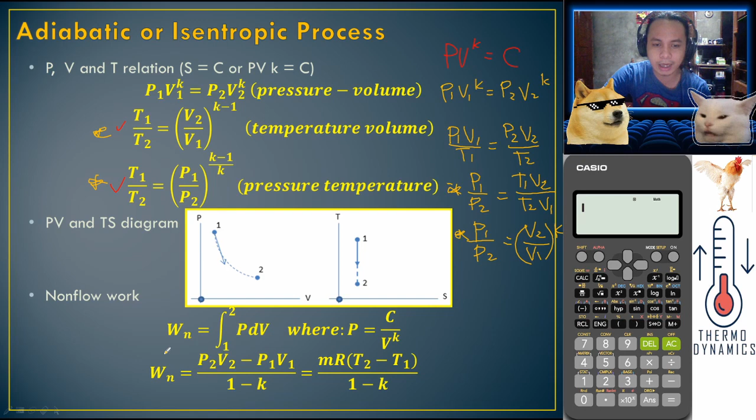Okay. And then we have the change in internal energy, MC delta T pa rin po. Or equal siya sa negative non-flow work. Ano ba yung non-flow work natin? Ito. So, kaya nga lang, negative po yung ating change in internal energy. But still, MCV delta T. Kagaya ni change in enthalpy, MCP delta T. Same pa rin.

Heat transferred. So, ang ating heat transferred daw ay 0. Okay. So, ito nga kasi yung definition ni adiabatic process. There is no heat transferred to or from the system. Kaya 0 yung ating heat. And kung 0 yan, doon pala nakuha yung delta U is equal to negative non-flow work. Kaya pala bigla tayo nagkameron dito. And last, change in entropy is matic 0 siya. Kaya nga po siya isentropic.

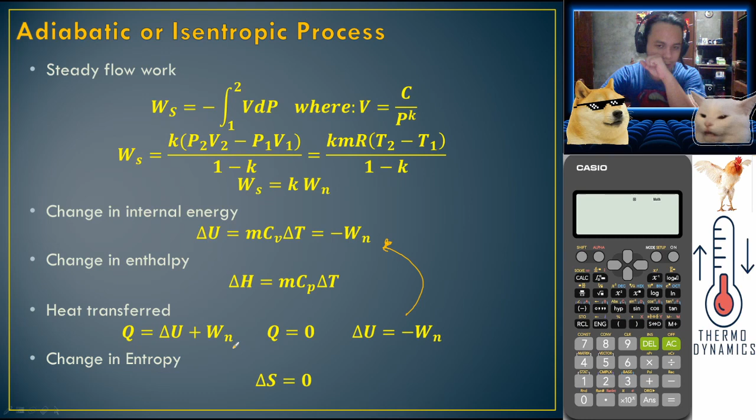Okay. So, dapat po, kabisado natin yung mga formula. Kaya nga lang, magkaka-connect po yan. Kaya po mahalaga na kapag tayo ay nagmamaster ng formula, kailangan po kabisado natin yung bawat isa. Alam natin yung mga pagkakaparehas nila at saka yung mga differences nila.

Okay, 29. Air having an initial pressure of 6,516 kilopascals and an initial volume of 0.113 cubic meter and final volume of 0.057 cubic meter. Calculate the pressure at the end of compression. Alright, so paano ba yung gagawin natin dito? Ang given lang po sa atin is the pressure, and then meron tayong V1 and V2. Hinahanap si pressure at the end of compression. So, most of the time, kapag compression pinag-uusapan, pupunta tayo sa isentropic.

So, ang gagamitin natin is the first formula. We have P1V1 raised to K equals P2V2 raised to K. The problem is, hindi binigay sa problem yung K. Pero pag air po, dapat kabisado natin yung constant K, the gas ratio. Ano po ba ang gas ratio kapag air? We have K is equal to 1.4. And kapag alam natin si K equals 1.4, madali na pong i-solve yung ating problem.

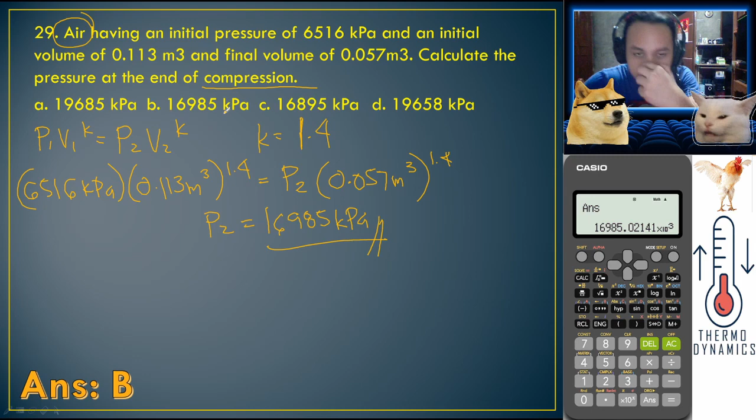Solved! We have 16985 kilopascals. So, meron ba tayo dyan? Of course. Letter B. Medyo nakakalito lang yung mga choices. Pero yun, 16985 kilopascals. Alright! So, proceed tayo sa number 30.

How much work is necessary to compress air in an insulated cylinder from 0.20 cubic meter to 0.01 cubic meter? Use T1 equals 20 degrees Celsius and P1 equals 100 kilopascals. So, ito po pag nakita nyo, matic isentropic. Alin po yun? Insulated. Kapag isentropic, there is no heat transferred papunta sa system or paalis sa system. Therefore, we can call that system insulated. So, kapag nakita natin yung keyword na insulated, matic isentropic.

Ano po bang given? Dalawang volume, tapos meron tayong T1 at saka P1. Ang tanong, work. Dalawa naman yung pagpipilian natin sa work. Sabi natin, non-flow work lagi pag hindi sinabi kung steady. So, non-flow work is equal to P2V2 minus P1V1 all over K minus 1 ba o 1 minus K? 1 minus K. O kaya naman ay MR delta T, T2 minus T1, over 1 minus K.

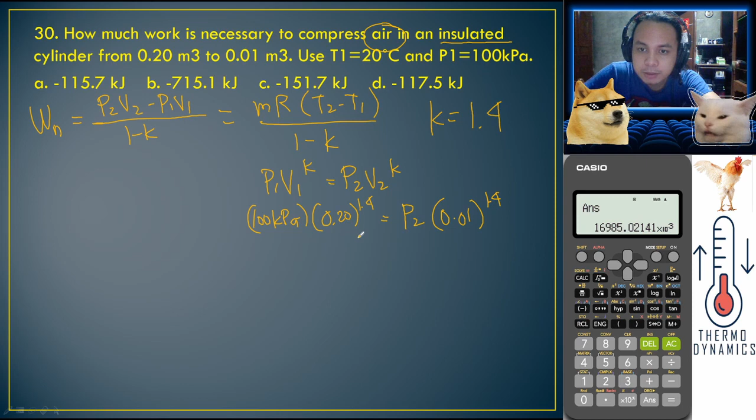Okay, game. Kunin natin si P2: 100 kilopascals times 0.20 raised to 1.4, over 0.01 raised to 1.4. So we have P2 equals 6.63 megapascals.

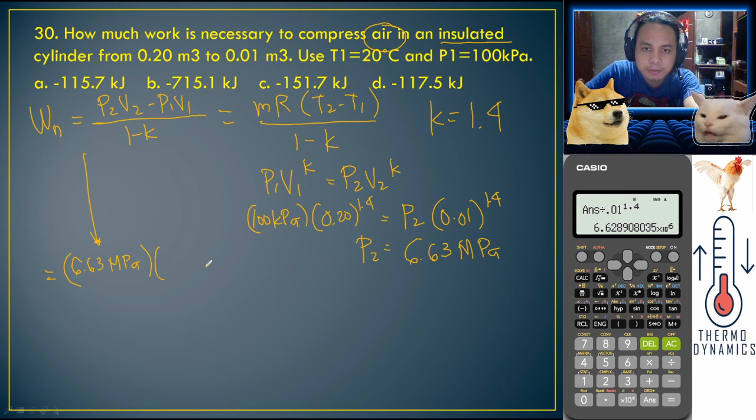And yan po yung gagamitin natin sa ating formula. Okay, so dito na natin ilagay. So we have P2V2, 6.63 megapascals times V2, 0.01, minus P1, 100 kilopascals, times V1, 0.20, all over 1 minus 1.4.

So pag ginawa natin yan, diretso na natin sa ating calculator. We have times 0.01 minus 100 kilopascals times 0.20, all over 1 minus 1.4. So the answer is negative 115.72 kilojoules.

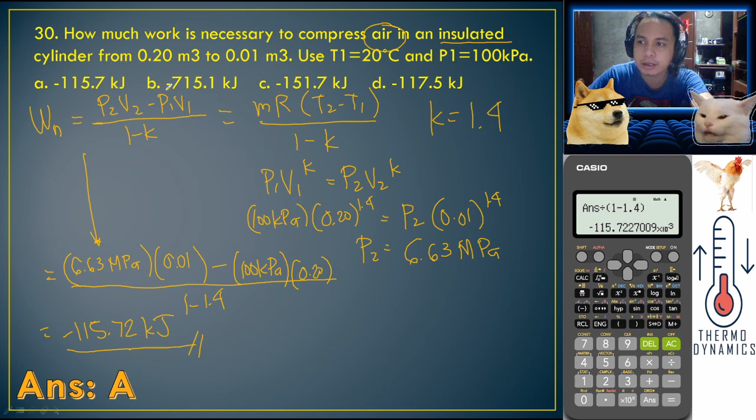So negative 115.72 kilojoules. Meron ba tayo dyan? Of course, letter A. Okay. So, negative po yung nakuha natin. Ibig sabihin, negative po yung work. Pag sinabing negative work, it is the work done to the system. Pag positive, work done by the system.

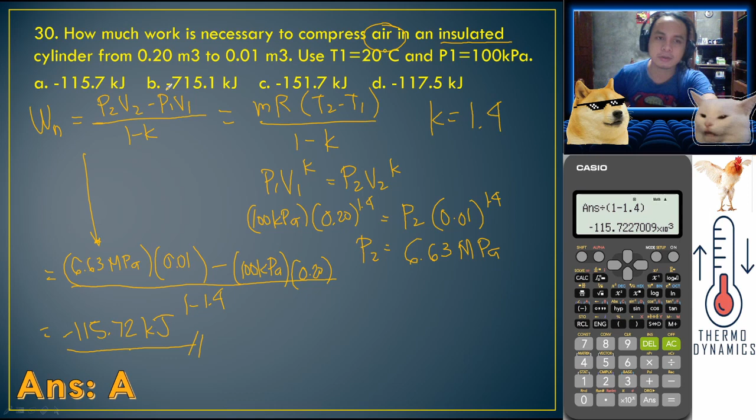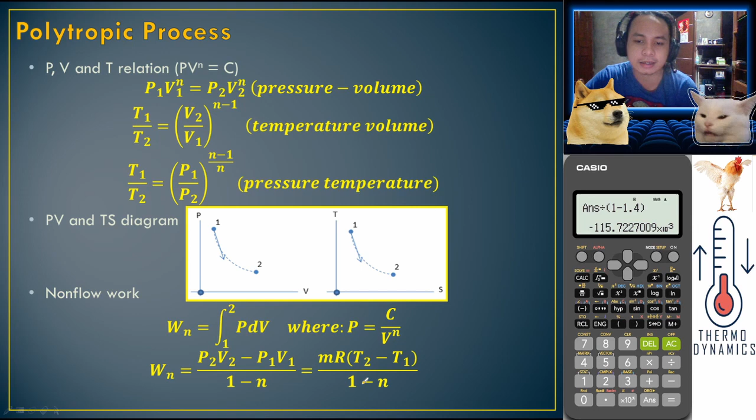Okay. So, next. The last process na meron tayo, the polytropic process. Ito po ay halos parehas lang ng ating isentropic process. Pinalitan lang po natin yung K ng N. Same with PV and TS diagram. Non-flow work: instead of 1 minus K, 1 minus N. And then we have the steady flow work. Ang multiplier natin sa numerator ay N instead of K.

Then, change in internal energy, same. Change in enthalpy, same lang din. And then, we have the heat transferred. Ito naman po yung pinagkaiba nila. This time, ang heat transferred natin is MCN delta T. So, ano po yung CN? CV times K minus N all over 1 minus N. Tatandaan nyo to. Ito yung bagong formula sa polytropic process.

Ang pinagkaiba kasi sa ating adiabatic, isentropic, ang ating heat transfer ay 0. And then, we have change in entropy: MCN ln T2 over T1. Ito po yung original formula ng ating entropy, ang nababago lang is yung ating C. Ito lang po talaga ang kailangan tandaan na formula sa polytropic.

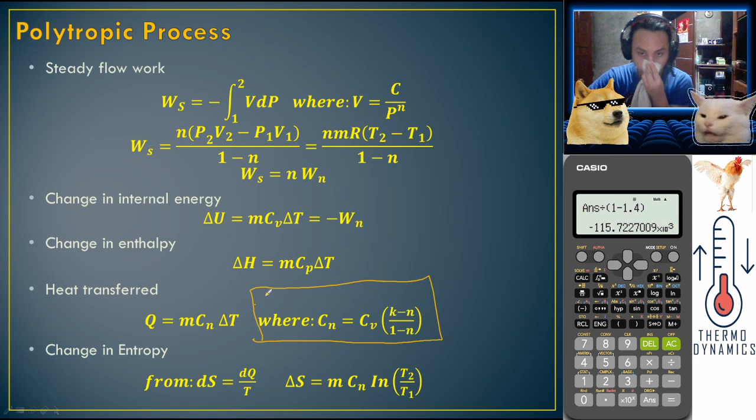Okay, game. Let's do this. 31. During the polytropic process of an ideal gas, the state changes from 138 kilopascals and 5 degrees Celsius to 827 kilopascals and 171 degrees Celsius. Find the value of N. Tingnan muna natin yung ating mga given. We have temperature 1, temperature 2, P1, and P2. Tapos hinahanap ang value ng N.

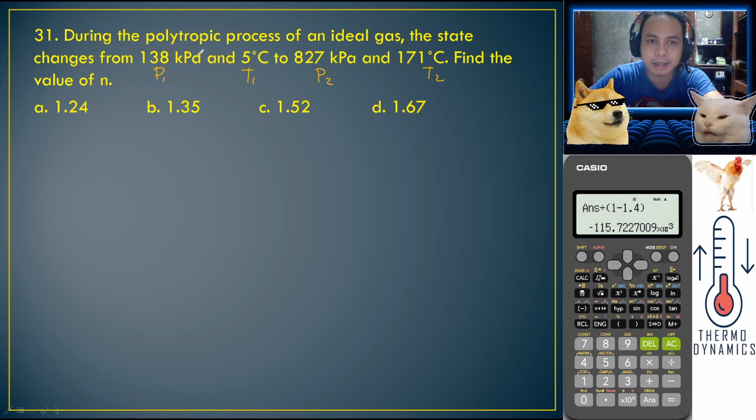So, dito, madali lang. We will just use the formula for PV and T relations. Kaya nga lang, ang alam natin is the first formula, yung pressure at saka volume. So, i-derive natin yung pressure at saka temperature. Doon muna tayo sa pressure and volume. Tapos, alam natin ang ating combined gas law, P1 V1 all over T1 equals P2 V2 all over T2. Since ang kailangan natin is P and T, say goodbye muna tayo sa ating volume.

So, we have V1 over V2 raised to N equals P2 over P1. Ang kailangan natin matanggal is yung V1 over V2. Dito natin kukunin yun. So, we have V1 all over V2 equals P2 T1 all over P1 T2. Itong P2 T1 over P1 T2 ay ipapasok natin dito.

So, ang ating formula na makukuha ay P2 T1 all over P1 T2 raised to N equals P2 over P1. And that's what I'm saying, hindi na natin kailangan sauluhin yung form na nandun sa binigay kong formula. We just used the formula P1 V1 raised to N equals P2 V2 raised to N at saka yung ating combined gas law. And tada! Yan na po ang ating formula. So, game. Ipasok lang natin yung mga kailangan. P1 is 138.

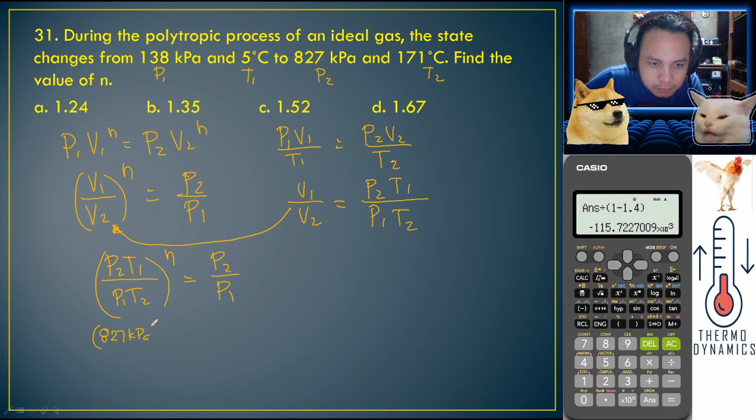Okay. So, game. So, we have P2. P2 is 827 kilopascals. T1. So, T1 natin is what? 5 degrees Celsius. Pero, huwag kakalimutan na, dapat naka-Kelvin. Next, we have P1, 138 kilopascals, times 171 plus 273 raised to N. Yan yung hinahanap.

Equals P2 over P1. 827 kilopascals all over 138 kilopascals. And then, makukuha na natin si value ng N kapag nag-shift solve tayo. So, game. Tiranin na natin to. Let's go! We have 827 times 5 plus 273, 278. Then, 138 times, compute ko to. Yan. So, naka-raise to N tayo, di ba? Oo. So, raise to X, equals ratio of 827 at saka 138.

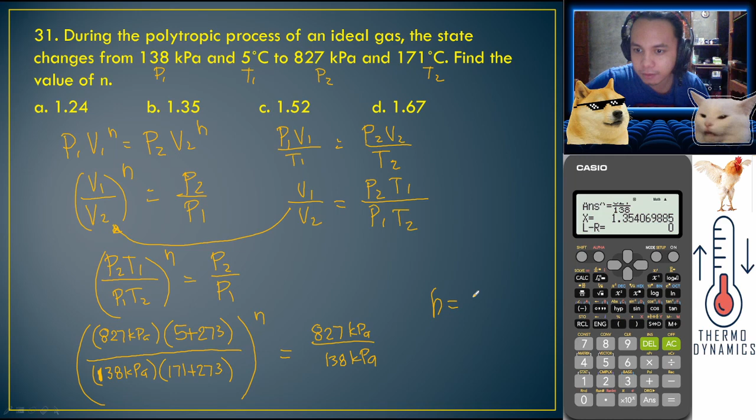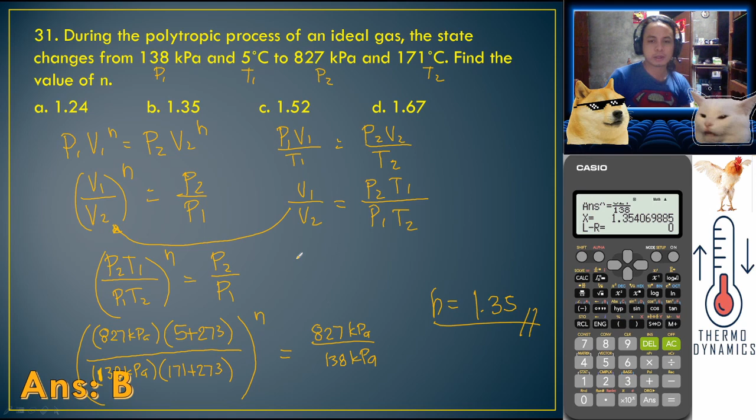Shift solve equals. So, ang nakuha nating value is 1.35. Okay, 1.35. Oh, meron ba tayo dyan? Yes, sir. Letter B. Easy. Alright. So, ganun lang po. Again, we don't need to memorize the second and the third formula in the PV and T relationship of polytropic and isentropic processes. Okay, so last question ng ating part 9 of thermodynamic lecture series.

Game! Let's do this. One gas at 1 atmosphere pressure originally occupies a volume of 20 cubic feet. The gas is polytropically compressed with N equals 1.15 until the pressure is 48.51 psia. What work is required for this compression? Okay, so this time, sabi nga natin meron tayong dalawang formula ng ating non-flow work. Ano nga ulit yun, sir? Recall lang tayo. We have P2V2 minus P1V1 all over 1 minus N. Then we have MR delta T, T2 minus T1 all over 1 minus N.

Okay, so dapat alam natin kung anong gagamitin natin dito. Game. Meron tayo ditong 1 atmosphere. That's the first pressure. Volume. So we have V1. Okay, so P1 V1. Meron tayong N. Pressure is 48.51. Alright, so meron tayo ditong P2. So P1 at P2 present. So malamang first equation yung ating gagamitin. Tapos may V1 pa. So V2 na lang yung kulang. Since walang V2, hanapin muna natin siya. So first equation ng ating PV and T relationship. We have P1V1 raised to N equals P2V2 raised to N.

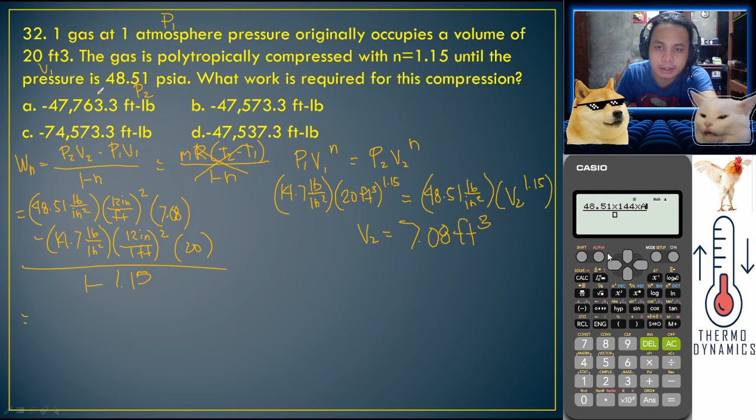Okay, so pindutin na natin sa calcu. So we have 48.51 times 144 times 7.08, which is yung ating nakuha kanina, minus 14.7 times 144 times 20 all over 1 minus 1.15 equals negative 47,560. Meron ba tayo dyan? Sir, wala po. Pero pinakamalapit yung ating kukuning sagot dyan. Alin yung pinakamalapit? So, parang si letter B yung pinakamalapit, no? 13 lang yung difference. Alright, so tama, letter B.

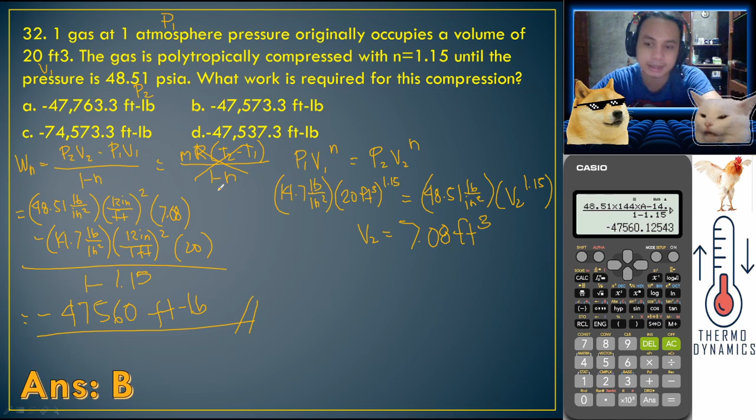Okay, so that's all for our thermodynamic processes. And to summarize those process na pinag-aaralan natin, the general equation for thermodynamic curves is PV raised to n equals C. So yan po yung ating polytropic. Wherein si n kapag 0, siya ay isobaric process. So, V to the 0 is equal to 1. Mangyayari, P equals C. Constant pressure. Then, isothermal, N is equal to 1. Magiging PV equals C, the equation of isothermal process, PV and T relationship.

Kapag naman isentropic, PV raised to K equals C. And last, kapag isometric, PV raised to infinity is equal to constant. So, V raised to infinity, constant volume, isometric.